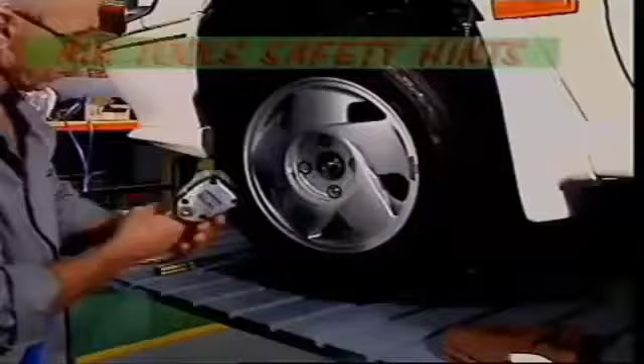Air tools use compressed air to do a number of tasks. Air can come out of a pneumatic tool with a lot of force, and that can cause damage and injury. So before using an air tool, it's important to check all of its connections are secure and the hoses are in good condition and not leaking.

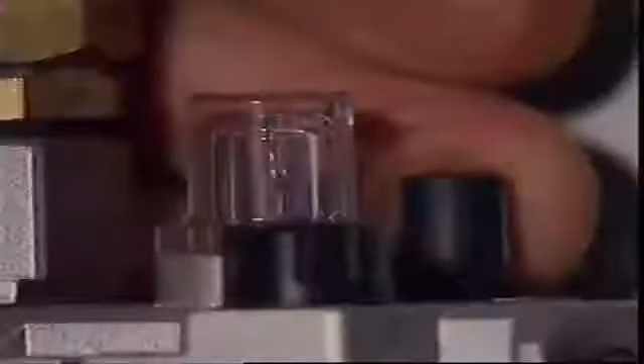It must be lubricated before it's used. This may be done automatically by an inline oil mister that puts a mist of oil in the air supply. Or it may need some squirts of light oil into the air inlet fitting. This model also removes moisture from the air before it's fed to the tools.

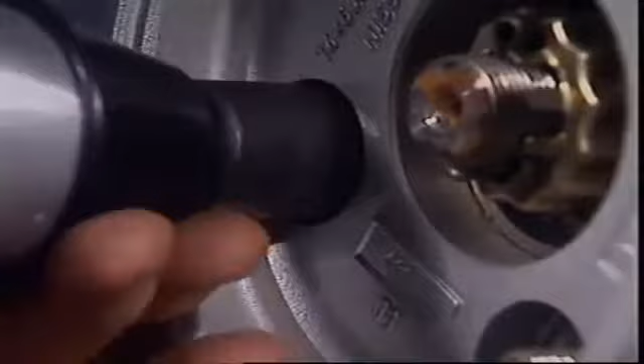The most common pneumatic tool in an automotive workshop is the air impact wrench. It's sometimes called a rattle gun. It's easy to hear why. Taking the wheels off a car to replace the tyres is a typical application for this air tool. It often needs a lot of torque to twist the nuts free.

The rattle gun can be set to spin in either direction, and this valve controls how much torque it applies. It should never be used for finally tightening wheel nuts. There's a real danger of doing them up much too tight. That could cause the bolts to fail and the wheel shear off the vehicle while it's moving.

Another rule with the air impact wrench is to use only these specially hardened impact sockets, extensions and joints. The sockets are special 6-point types, and these flats can stand the sudden force that the rattle gun provides.

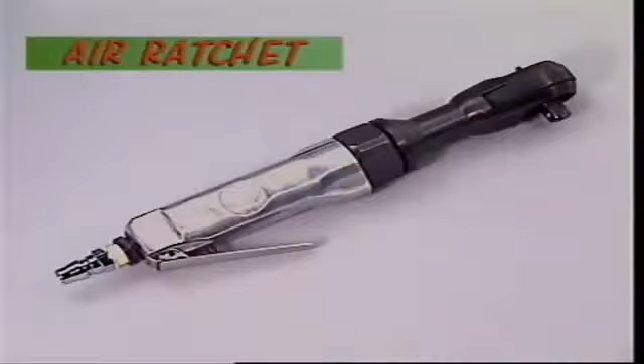This is an air ratchet. It uses the force of compressed air to turn a ratchet drive. It's used on smaller nuts and bolts. Once the nut is loosened, the air ratchet spins it off in a fraction of the time it would take by hand.

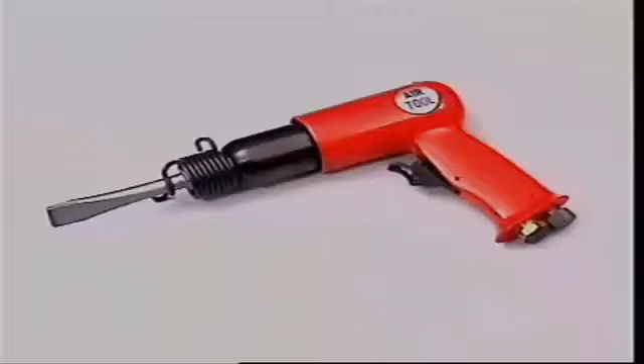This is an air chisel. It's useful for driving and cutting. The extra force that's generated by the compressed air makes it more efficient than a hand chisel and hammer. Just as there are many chisels, there are many bits that fit into the air chisel, depending on the job at hand.

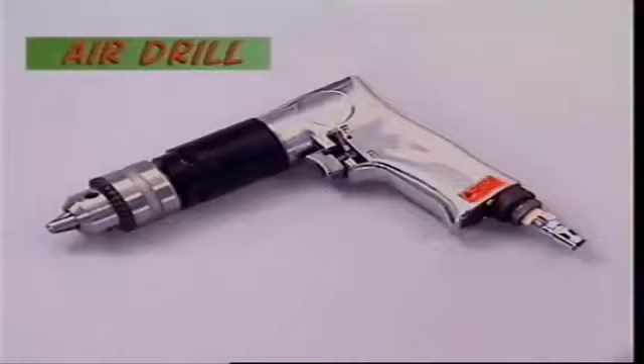This is an air drill. It has some important advantages over the more common electric power drill. With the right attachment, it can drill holes, grind, polish, and clean parts.

Unlike the electric drill, it doesn't run the risk of producing sparks, which is important around flammable liquids or petrol tanks. An air drill doesn't trail a live electric cable behind it, which could be cut and cause shock and burns. And an air drill also doesn't get hot with heavy use.

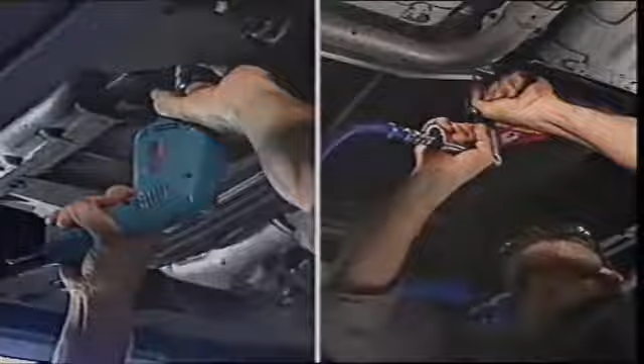This is the simplest air tool. It's a blowgun or air duster. It's really just compressed air by itself, controlled by a lever or valve. It's used to blast debris and dirt out of confined spaces.

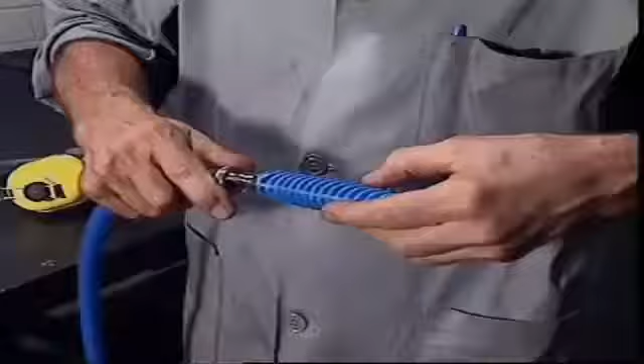That can be dangerous, so eye protection must be worn whenever it's used. Noise levels are usually high, so ear protection should also be worn. It's also dangerous to use it to clean yourself down. Its blast should always be directed away from the user and anyone else working nearby.

This is the most common kind of chisel, a flat chisel. It's made of high-quality steel, and the end is tempered and hardened because it has to be harder than any of the metals you're likely to want to cut with it. The head needs to be softer, so it won't chip when it's hit with a hammer. Safety goggles should always be used.

This nut is so corroded it's frozen onto the bolt. In this case, the nut and bolt will be thrown away, so a chisel can be used to remove them. A hacksaw could get the nut off, but a flat chisel is preferable.

The hammer should be much heavier than the chisel, so it won't bounce back or cause jarring. As the chisel goes to work, it helps to avoid damage by checking where metal chips are likely to fly. A couple of sharp blows and it's off.

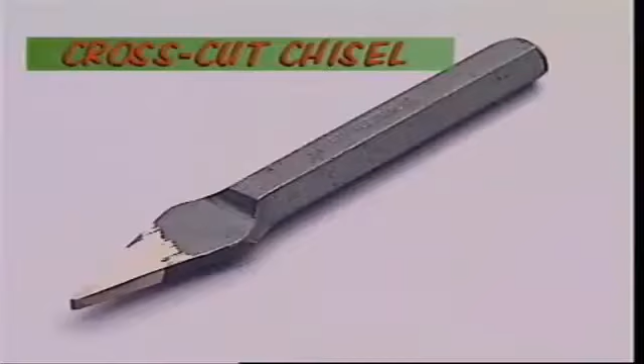This is a crosscut chisel. It's called crosscut because the sharpened edge is across the blade width. This chisel narrows down along the stock, so it's good for getting in grooves. It's used for cleaning out or even making keyways. The flying chips of metal should always be directed away from the user.

This is an air ratchet. It uses the force of compressed air to turn a ratchet drive. It's used on smaller nuts and bolts. Once the nut is loosened, the air ratchet spins it off in a fraction of the time it would take by hand.

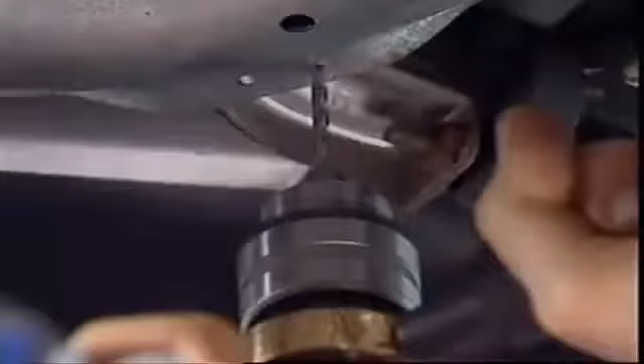This is a portable drill. This one has a cord you have to plug into an electrical supply. Cordless models use their own internal batteries. When you can't bring the work to the drill, you can take this drill to the work. But don't expect it to put large holes through very hard metal.

The biggest drill bit that'll fit in the chuck here is usually marked on the body of the drill, along with the speeds at which it turns. There are usually 2 speeds, but some drills can be set to any speed within their range.

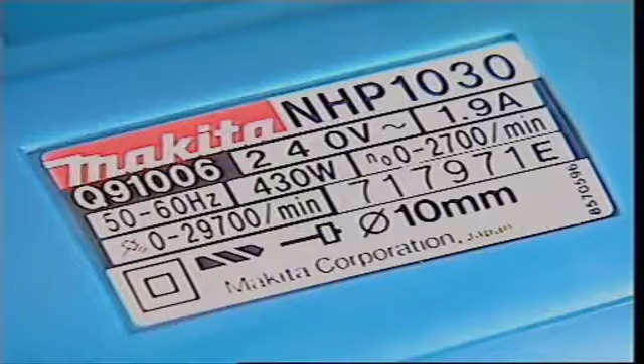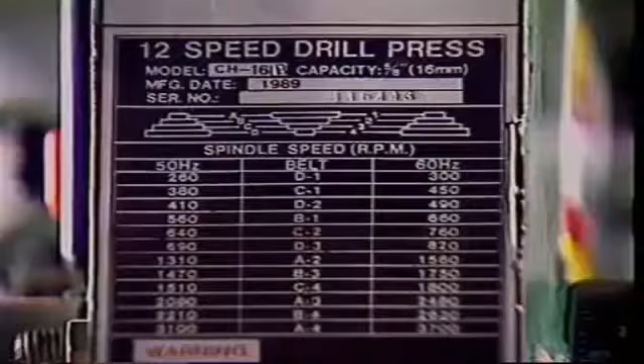A bench-mounted drill allows accurate drilling with more control, more so than a portable drill, which is convenient but can be difficult to guide accurately. A mounted drill can feed the drill bit at a controlled rate, and the work table secures the job at a constant angle to the drill bit. Also, this drill can be set to run at different drilling speeds. This drill chuck takes bits up to 16 millimeters in diameter.

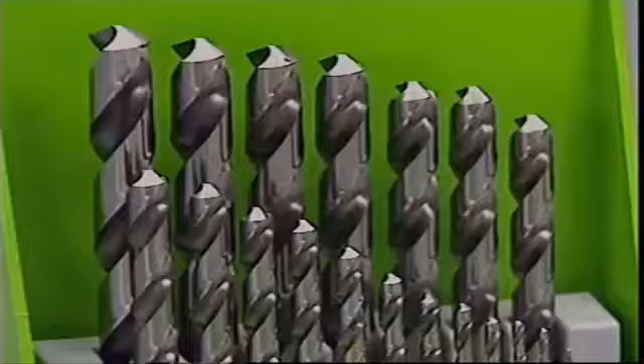Drill bits come in many closely spaced sizes. The most common is the twist drill. It has a point and a body, usually with 2 spiral grooves. And its shank is gripped in the jaws of the drill chuck.

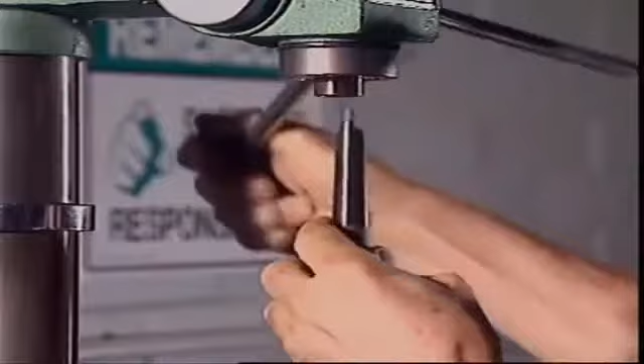A Morse taper is a system for securing drills. Morse taper size changes according to drill size. The shank of the drill bit is tapered, and it fits snugly into the drill spindle, which has a similar taper. This tang is also located in the spindle, and it drives the drill. It's a quick way to change drills without constantly adjusting the chuck.

When there's already a hole drilled in sheet metal that needs enlarging, a multi-fluted tapered hole drill will do the job in about the same time it takes to say it.

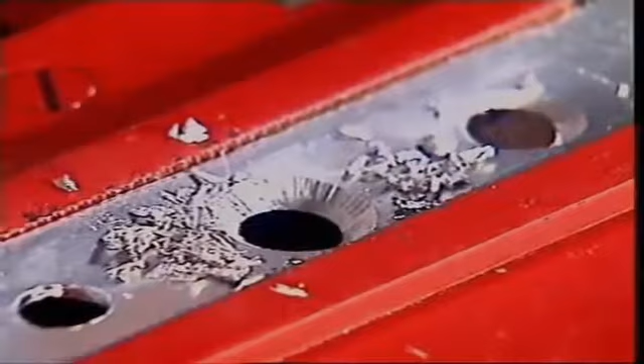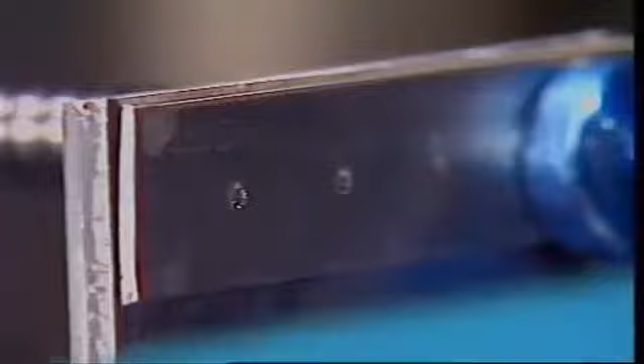A drilling speed chart should be kept near the bench or pedestal drill. It compares drill sizes and metals to show the proper speed. So to drill a 10mm hole through this piece of aluminium, the drill speed should be 1,800 revs per minute.

Screws are generally smaller than bolts. They can have a variety of heads. They're used on smaller components, and often their thread extends right from the tip to the head, so they can hold together components of different thicknesses.

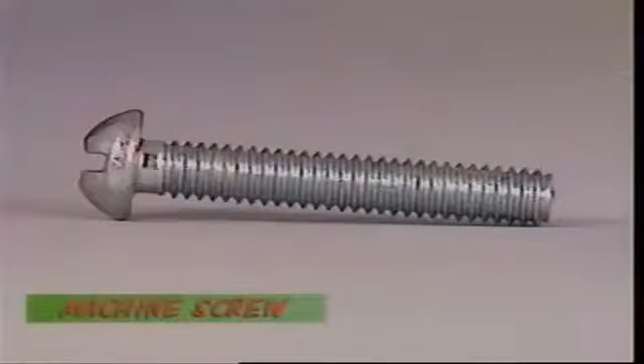Different screws can be tightened with a range of tools. This is an Allen head screw with a recess for an Allen key. It's sometimes called a cap screw. It usually screws into a hole rather than a nut, and it needs a small spanner. This is a machine screw. It has a slot for a screwdriver.

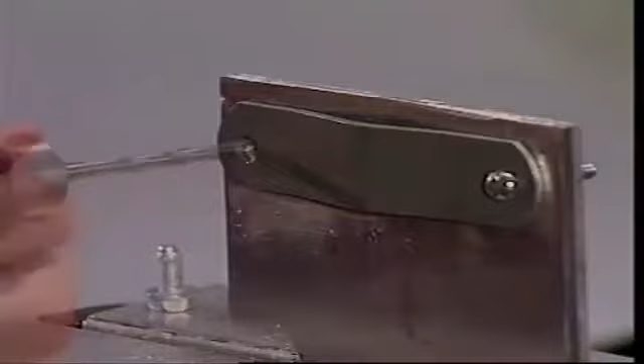Bolts are always threaded into a nut or hole that's got an identical thread cut inside. But a couple of special screws cut their own threads as they go. This is called tapping a thread, and this is a self-tapping screw. It's made of hard material that cuts a mirror image of itself into the hole as you turn it. This is also known as a self-tapping screw, but it's designed for cutting and holding thin sheet metal, so it's often used on car bodies.

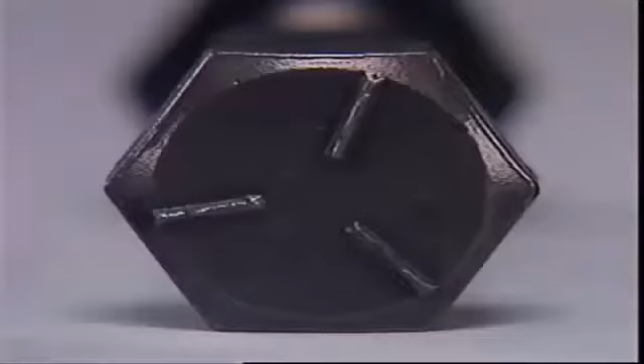Bolts are often bigger than screws and are used for heavier jobs. They nearly always have hexagonal heads that only fit spanners, or Torx drivers for these Torx bolts. Often the thread on a bolt is only as long as it needs to be to tighten onto the nut or into the threaded hole.

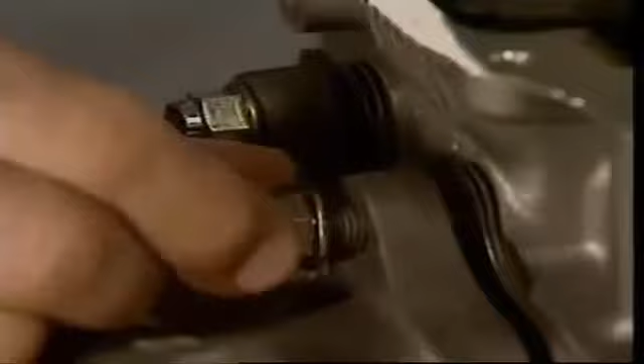A stud is like two bolts in one. The exhaust manifold on the cylinder head is located and held by studs. Studs can have different threads on each end. On this end, there's one that's best for gripping the hole in the cylinder head, and on the other end, there's a thread for pulling everything together tightly with a steel nut.

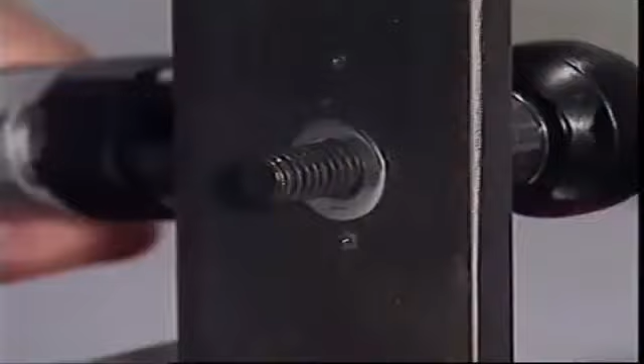Nuts are often used with bolts. A nut is a piece of metal, usually hexagonal, with a thread cut through it. There are many different ways to keep it done up tightly. This self-locking nut can have a plastic or nylon insert. Tightening the bolt squeezes it into the insert, where it resists any movement. The self-locker is highly resistant to being loosened by the kind of vibration that engines and vehicles experience.

Tightening this style of nut distorts the insert, so it only provides its locking effect the first time you use it. If you remove the nut, replace it with a new one. More secure still is this castellated nut with slots like towers on a castle. When it's screwed onto a bolt that's been drilled in the right spot, a split pin can be passed through them both and then spread open to lock the nut in place.

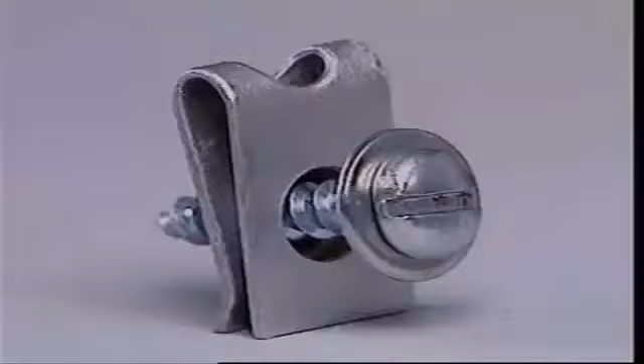A speed nut isn't as strong as the others, but it can be a fast and convenient way to secure a screw. Once the speed nut is started, it doesn't need to be held.

Some bolts and nuts need washers. Flat washers spread the load of a bolt head or a nut as it's tightened and distribute it over a greater area. This protects the surface underneath from being marked by the nut or head as it turns and tightens down. Flat washers should always be used to protect aluminium alloy.

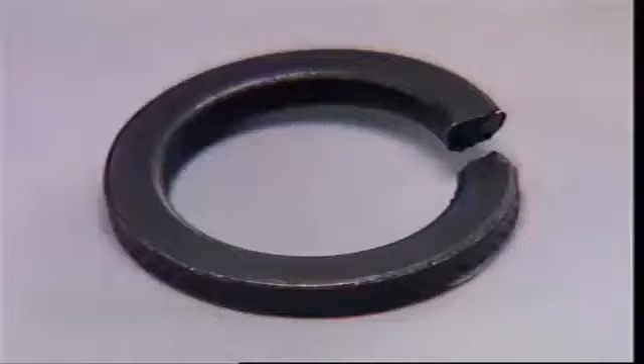Other washers tackle the problem of nuts working loose through vibration or movement. A spring washer compresses as the nut tightens, and the nut is spring-loaded against this surface, which makes it unlikely to work loose. The ends of the spring washer also bite into the metal. Spring washers are used more for bolts and nuts.

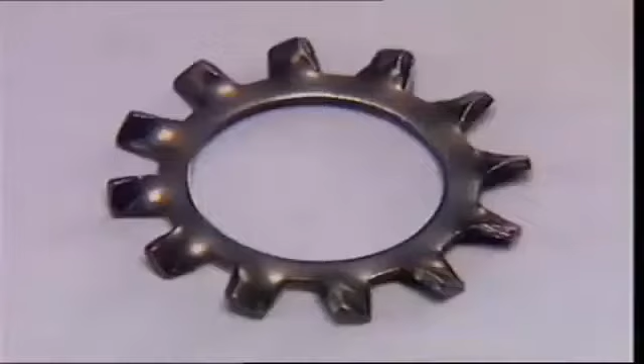Chemical compounds help prevent fasteners loosening. They're applied to one thread, then the other is screwed onto it. This creates a strong bond between them, but one that stays plastic, so in future they can be separated with a spanner if necessary.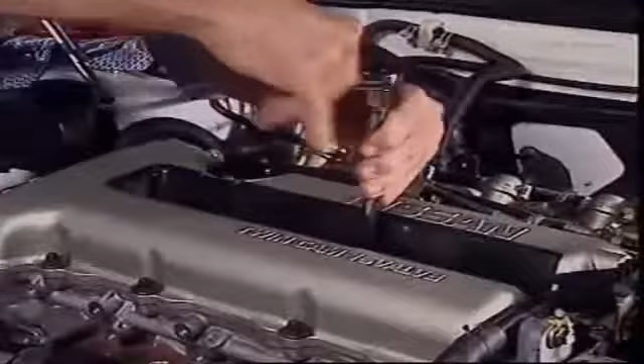Other compounds can be applied after assembly. Some metals react with each other and bind together. Spark plugs can do it when they're in aluminium cylinder heads. Anti-seize compound neutralizes the chemical reaction that can make this happen, and it prevents threads and fasteners from sticking together.

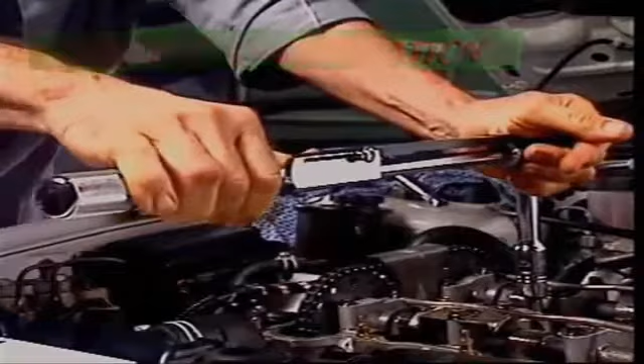Larger bolts and nuts must sometimes be tightened to a specified level, tight enough to hold components together, but not so tight that the component or the fastener could fail. This level of tightness is called a torque specification. Bolts and nuts are often marked to tell you how strong they are, how much torque can be safely applied to them.

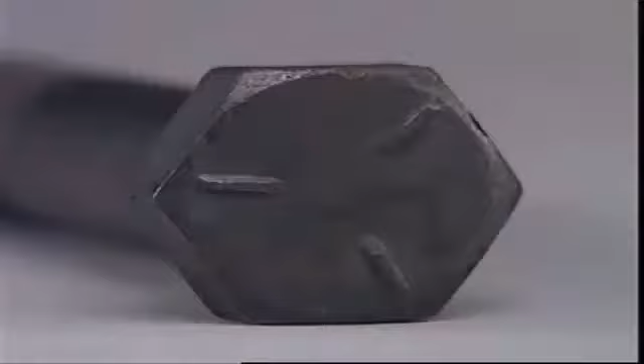This is a grade 5 bolt, as these markings show. This is a grade 8 bolt, so it can be done up more tightly without danger of it failing. The dots on this nut give similar information. This is a grade 8. These are imperial system markings. The metric system uses numbers stamped on the heads of metric bolts and on the face of metric nuts. Even studs have a marking system to make sure they're not overstressed when you tighten them.

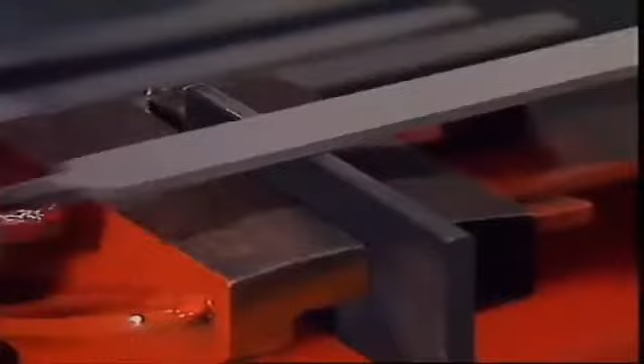Files are often sold without handles, but they shouldn't be used until a handle of the right size has been fitted. The handle should be checked before use. It can come loose, and it may need a sharp rap to tighten it up. Clean hands will help avoid slipping. Hands should always be kept away from the surface of the file and the metal that's being worked on. Filing can produce small slivers of metal which can be difficult to remove from a finger or hand. And acids and moisture from the skin can cause corrosion.

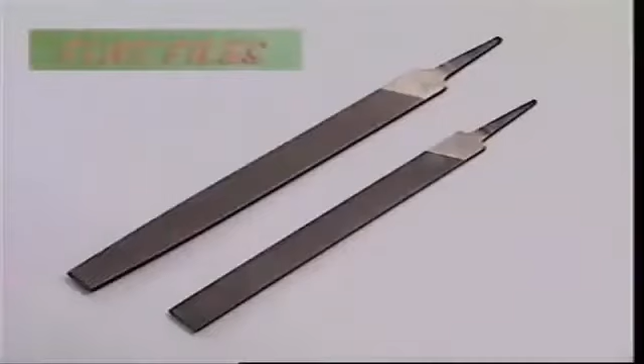What makes one file different from another is not just its shape, but how much material it's designed to remove with each stroke. That depends on the teeth. These are both flat files, the most common general purpose type, but their teeth are different. The teeth on this coarse grade file are longer, with a greater space between them. Filing this piece of mild steel removes a lot of material with each stroke. A coarse file leaves a rough finish.

This is a flat file, but its shorter teeth remove much less material on each stroke, and the finish is much smoother. On a job, the coarse file is used first to remove material quickly. Then a smoother file gently removes the last of it and leaves a clean finish to the work. The full list of grades in flat files from rough to smooth is rough, coarse, bastard, second cut, smooth, and dead smooth.

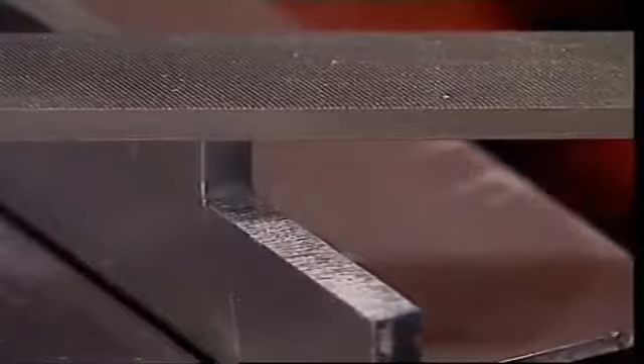Some flat files are available with one smooth edge, called safe edge files. They allow filing up to an edge without damaging it. Flat files are fine on straightforward jobs, but files need to be able to work in some awkward spots as well. A warding file is thinner than normal for working in narrow slots.

A square file has teeth on all 4 sides, so you can use it in a square or rectangular hole. A square file can make the right shape for a square metal key to fit in a slot. This is a 3-square file. It's triangular in section, so it can get into internal corners.

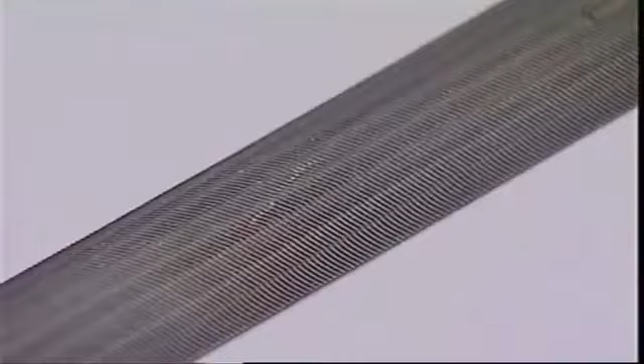Curved files are either half round or round. This is a half round. Its shallow convex surface can file in a concave hollow or in an acute internal corner. The fully round file, sometimes called a rat tail file, can make holes bigger. Or it can file inside a concave surface with a tight radius.

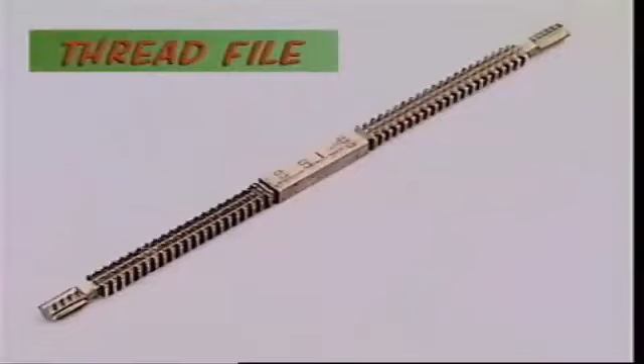This is a thread file. It cleans clogged or distorted threads. It has 8 different surfaces that match different thread dimensions, so the right face must be used. Files should be cleaned after use. If they're clogged, they can be cleaned by a tool that's really part of the family called a file card or file brush.

Depending on how hard or soft a material is, a special file may be needed. It's no good trying to file something if the file is softer than what is being filed. And softer metals like copper and aluminium can clog a conventional file.

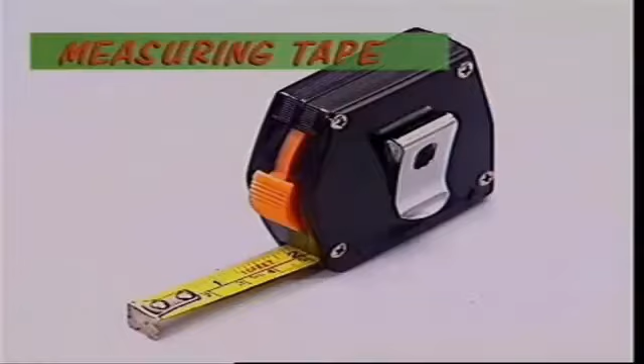Tools that measure the difference between any 2 points can be divided up according to how accurately they do it. A measuring tape is useful for checking spring sag. A steel rule is capable of accurate measurement down to a millimetre. The graduations must stay as close as possible to the points being measured, and the rule must be read as close to square on to the scale as possible.

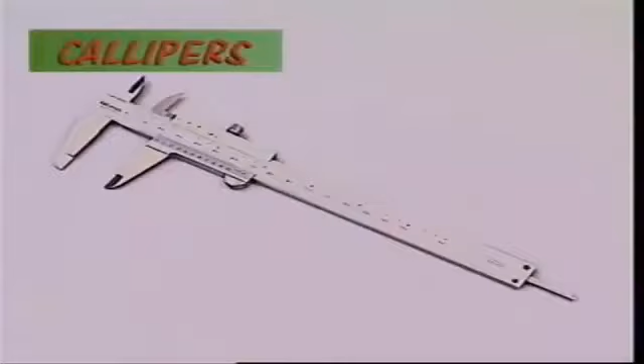If a distance needs to be measured with a high degree of accuracy, vernier calipers can be used. The sliding jaw grips the surfaces being measured on the outside, or for an internal measurement with these jaws on the inside. Depth can also be measured with the end of the caliper slide. Once the measurement is taken, this screw locks it in.

Inches or millimetres are read here, and the fractions on this vernier. That gives this the name of vernier calipers. Other calipers show the fractions on a dial or an electronic readout. This is a precision instrument that'll measure down to 2/100ths of a millimetre or 1/1000th of an inch.

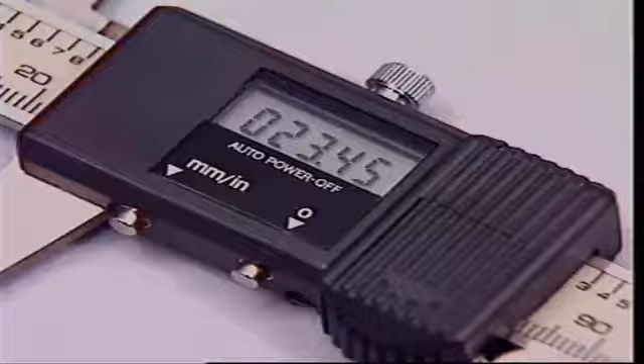For the highest accuracy in measuring distances, micrometers are used. Like calipers, they can measure an outside dimension, inside, or depth. But a different mic, as they're called, is needed for each task. This is an outside micrometer, the most common one.

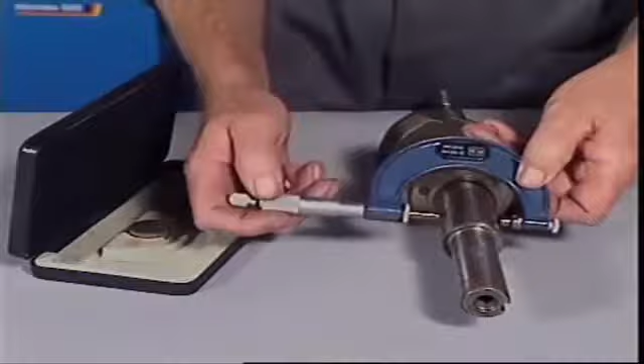The object to be measured is nipped very lightly between the anvil, the part that stays still, and the spindle which moves towards it on a very fine thread. The distance between them is read off the scale on the barrel, down to the finest fraction, which is read off the scale that turns on the thimble.

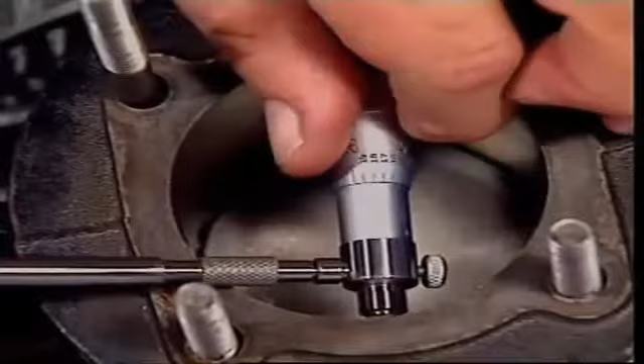For inside measurements, this inside micrometer works on the same principles as the outside micrometer, and so does this depth micrometer. They give a very accurate readout of even the tiniest movement of a very finely threaded spindle. They must be kept clean, especially along surfaces that do the measuring. They should read 0 when fully closed, and be checked and adjusted as described in the instructions that come with them.

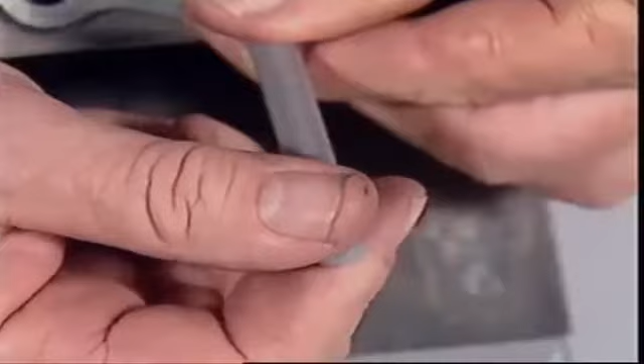For measuring distances in awkward spots like the bottom of a deep cylinder, this telescopic bore gauge has spring-loaded plungers that can be unlocked with this screw, so they slide out and touch the walls of the cylinder. The screw then locks them in that position. The gauge can be withdrawn, and the distance across the plungers can be measured with a micrometer or calipers to convey the diameter of the cylinder at that point.

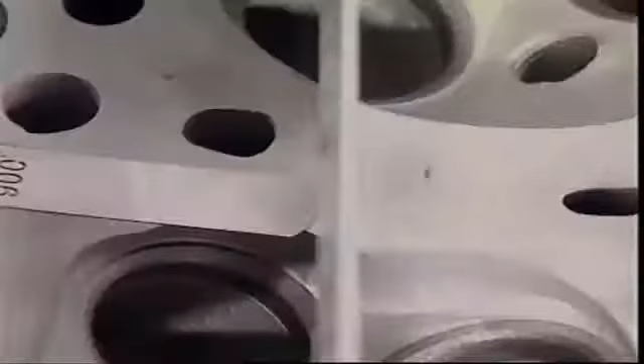In automotive workshops, clearances and narrow gaps often need to be measured. This is done with a set of feeler gauges. The markings on these strips show they're graded from fractions of a millimetre up to a few millimetres. They're used by finding one that fits smoothly in the gap being measured. Sometimes the best fit must be made by using a combination. Then the measurement is the total thickness of all the gauges that fitted into the gap.

Roundness and squareness sometimes need measuring. This crankshaft can be rotated in these V-blocks. If it's bent, it will show on the dial gauge. It senses slight movement at its tip and magnifies it into a measurable swing on the dial.

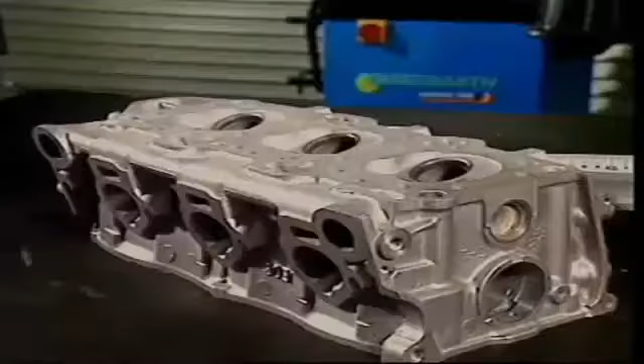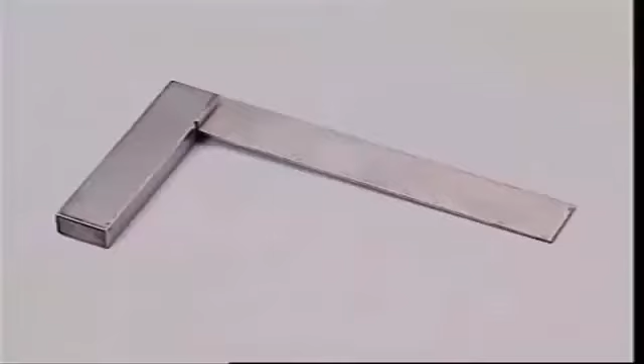To check whether something is square, parallel, flat or true, a straight edge is used. It's placed against the surface that needs checking. This tri-square is a rectangular blade fitted at precisely 90 degrees to a solid stock. A simple idea and simple to use.

The most common hammer in an automotive workshop is the ball peen or engineer's hammer. Like most hammers, its head is hardened steel. A punch or a chisel can be driven with this flat face. Its name comes from the ball peen or rounded face. It's usually used for flattening or peening a rivet. The hammer should always match the size of the job, and it's better to use one that's too big rather than too small.

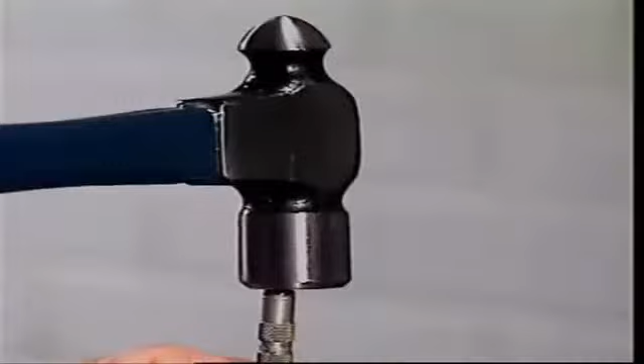This is a soft face hammer. Hitting chisels with a steel hammer is fine, but sometimes you need just to tap a component to position it. A steel hammer might mark or damage it, especially if it's made of a softer metal like aluminium. What you use is a soft face hammer. Some are very soft with rubber or plastic heads, through to those using brass or copper.

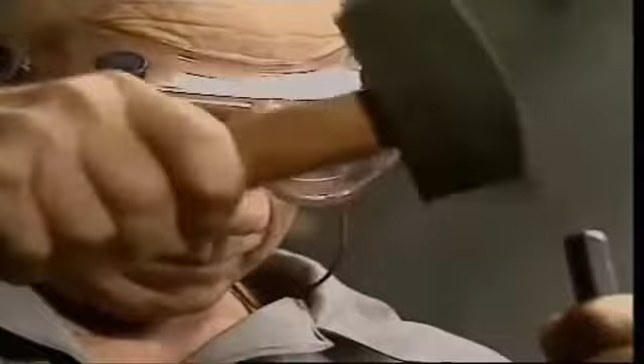When a large chisel needs a really strong blow, it's time to use the lump hammer. It's like a small sledgehammer with two square faces made of high carbon steel. It's the heaviest hammer that's used one-handed. The most common mallet in the workshop has a head made of hard rubber. It's a special purpose tool used most often for fitting tyres onto rims.

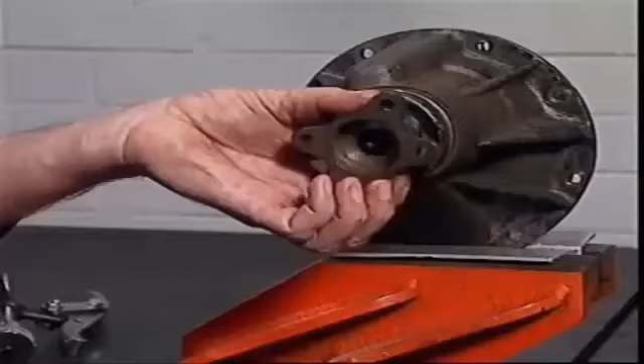This is a dead blow hammer. It's designed not to bounce back when it hits something. A rebounding hammer can be dangerous or destructive. Its head is either made of lead or it's hollow with lead shot inside. The lead absorbs the blow.

Making sharp, clean lines on metal requires a sharp, clean point. This is a scriber. It's made from hardened and tempered tool steel. To mark a line with a scriber, draw it towards you and keep it angled in the direction it's going to travel so it doesn't dig into the surface being marked.

On some hard or shiny surfaces, scribe marks can be hard to see, so marking dye helps. A thin coat is applied to the area being marked. It dries very quickly. Then the path cut by the point of the scriber is easy to see.

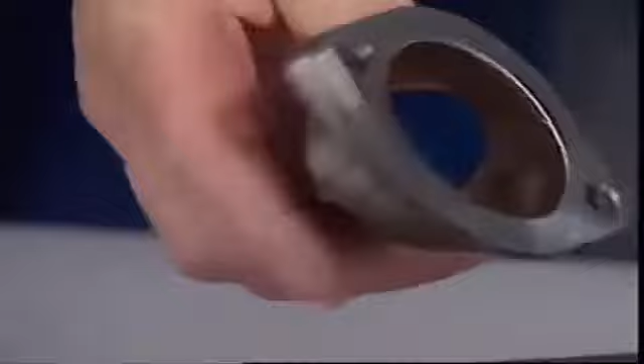Engineer's blue is similar to marking dye. It comes in tubes and it's a bit like blue butter. Sometimes in checking a fit or testing for flatness, it's difficult to see the area being worked on. By smearing a small amount of engineer's blue on a surface plate, it can be used to indicate if the surface to be tested is flat. The blue marks on the housing indicate the high areas which must be removed to obtain a flat surface. A flat surface would be blue over the whole surface.

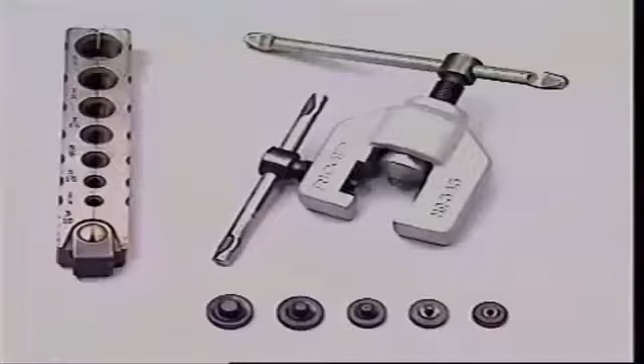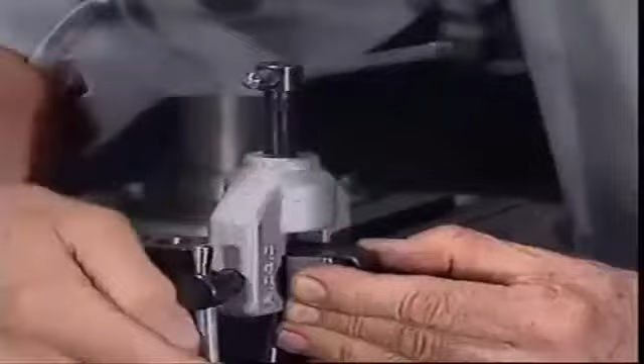The flaring tool has two parts: a set of bars with holes that match the diameter of the pipe end to be shaped, and a yoke that drives this cone into the mouth of the tube. The two most common shapes are a single flare, for pipes carrying low pressures like a fuel line, and the double flare for higher pressures such as in a brake system. To make a single flare, start with the pipe level with the top of the flaring bars. With the clamp screw firmly tightened, the feed screw flares the end of the tube.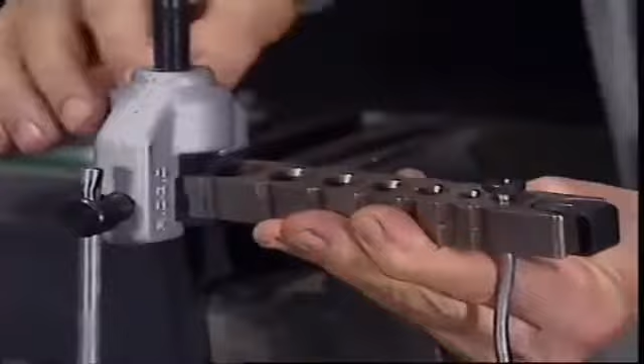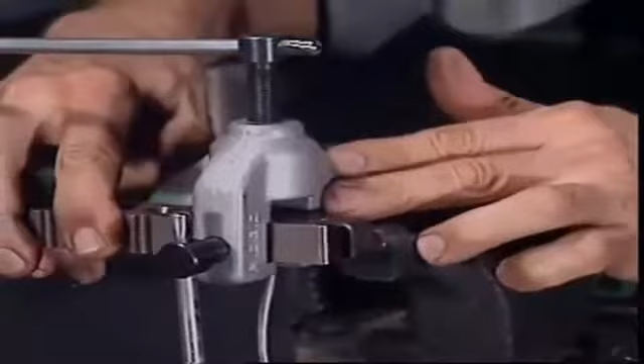Making a double flare is similar, but more of the tube is exposed to allow for the folding over into a double flare. This double flaring button now goes into the end of the tube. The double flare button comes out, and the pipe looks like this. Turning the feed screw completes the forming of the double flare.

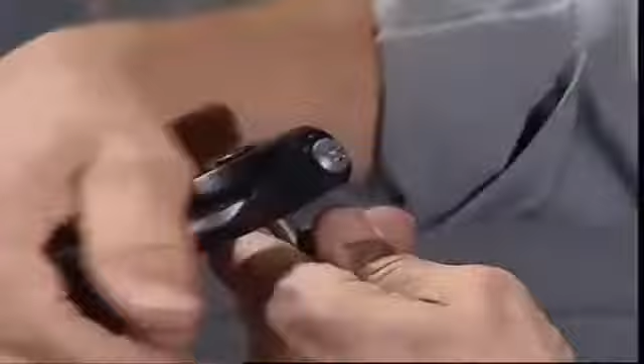A pipe cutter is more convenient and neater than a saw when cutting pipes and metal tubing. This sharpened wheel does the cutting. As the tool turns around the pipe, this screw increases the pressure, driving the wheel deeper and deeper through the pipe until it finally cuts right through. There is a larger version that's used for cutting exhaust pipes.

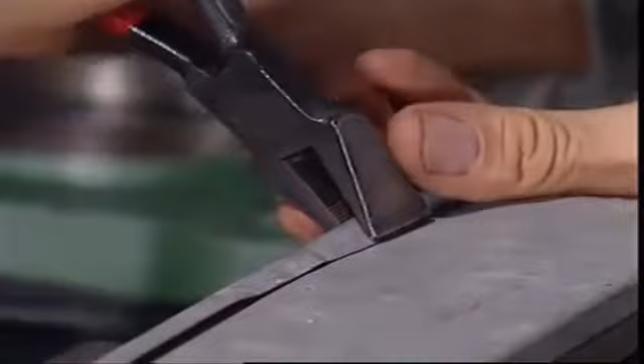When applying pressure to pliers, make sure your hands aren't greasy. Otherwise, sooner or later, they're going to slip. Select the right type and size of pliers for the job. As with most tools, if you have to exert almost all of your strength to get something done, then you're using the wrong tool, or you're doing it incorrectly. If it lets go, you're going to get hurt. At least, you'll damage the tool and the work.

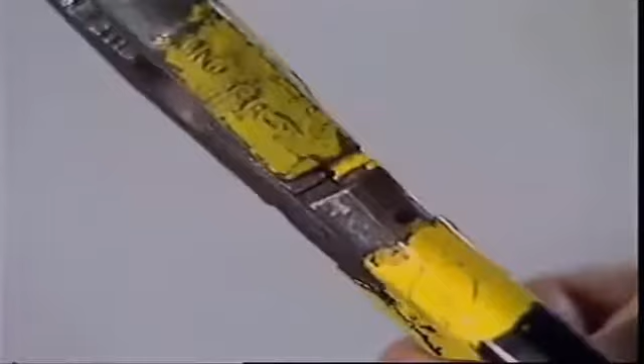Pliers get a lot of hard use in the workshop, so they do get worn and damaged. That makes them inefficient and even dangerous. Always check the state of all workshop tools on a regular basis.

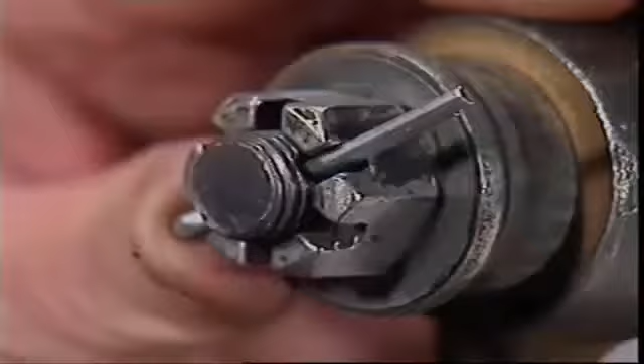Combination pliers are made from two pieces of high carbon or alloy steel. They pivot together so that any force applied to the handles is multiplied in the strong jaws. Some pliers provide a powerful grip on objects, others are designed to cut. Combination pliers can do both. That's why they're the most common type. There are two surfaces for gripping flat or rounded objects, and two pairs of cutters. The cutters in the jaws should be used for softer materials that won't damage the blades. These cutters next to the pivot can shear through hard, thin materials, like steel wire or pins.

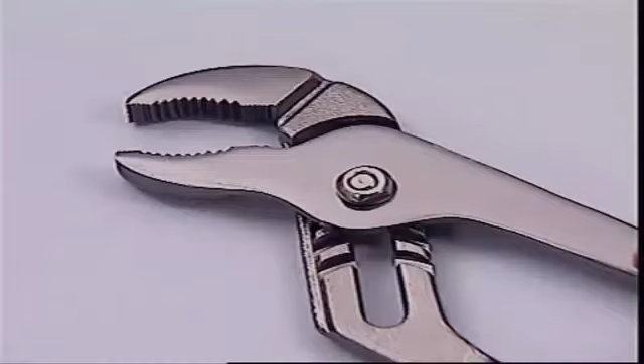Most pliers are limited by their size in what they can grip. Beyond a certain point, the handles are spread too wide, or the jaws can't open wide enough. But these multi-grips overcome that with a movable pivot. A pair of multi-grips can get a comfortable grip on a range of objects, and there are two surfaces for things that are flat or round.

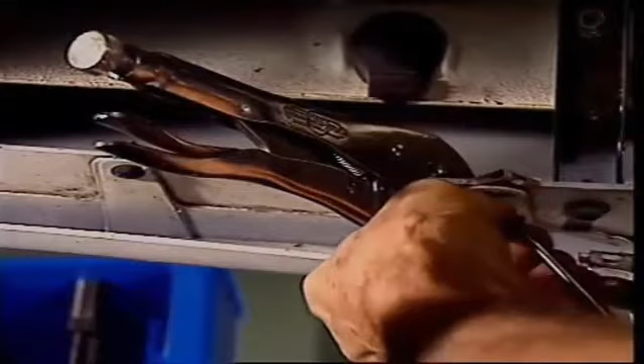Vice grips are general-purpose pliers. Put an object between the jaws. Turn this screw until the handles are almost closed, then squeeze them together to lock shut. They can also be used as temporary clamps in case a free hand is needed elsewhere. There are a few specialized pliers in most workshops. These long-nosed pliers can reach tight spots that others can't.

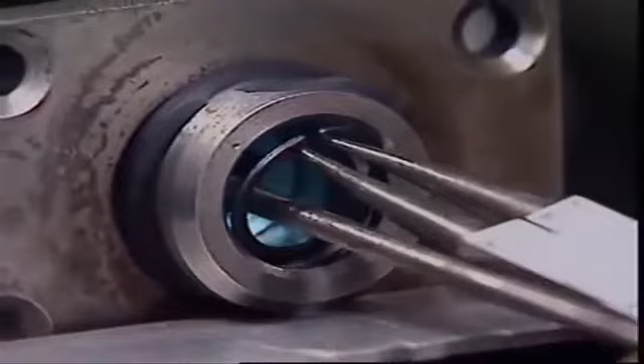Circlip pliers have metal pins that fit in holes in a circlip. Squeezing the pliers compresses the circlip and fits it in its groove. There's also a special pair for external circlips that are sprung to push them open. These cutters are called nippers or pincer pliers. They have a cutting edge at right angles to their length. They get a grip on and cut through anything sticking out from a surface. Rolling them on the curve of the jaws gives leverage too.

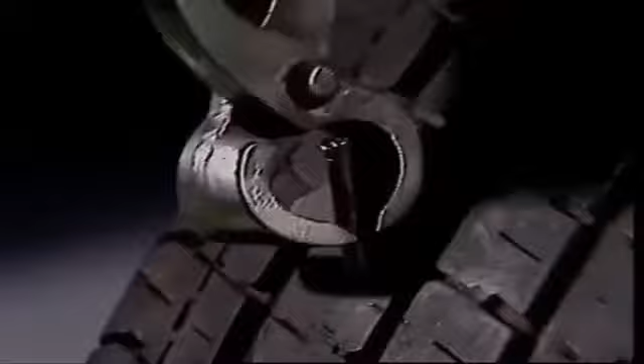Side cutters work with any length, say a piece of wire or a steel pin. They're the most common cutters in the toolbox, but they shouldn't be used on hard or heavy gauge materials. Bolt cutters cut heavy wire, rods and bolts. Their compound joints and long handles give the leverage and cutting pressure that's needed for heavy gauge materials.

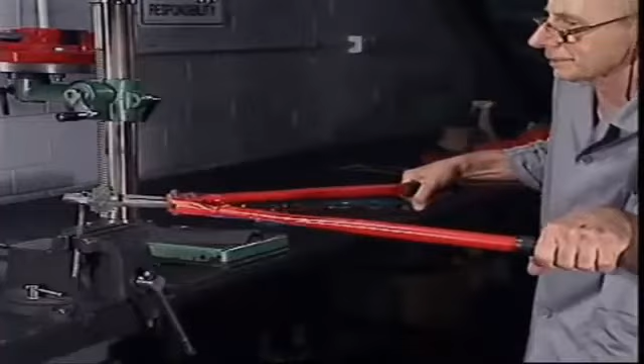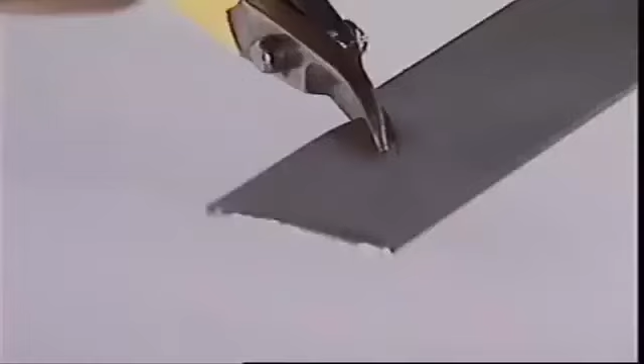Tin snips are the nearest thing in the toolbox to a pair of scissors. They can cut thin sheet metal, and lighter versions make it easy to follow the outline of gaskets. Most snips come with straight blades, but if there's an unusual shape to cut, there is a pair with left or right hand curved blades. Aviation snips are designed to cut hard metals. They're easy to use because the handles are spring-loaded open and double pivoted for extra leverage.